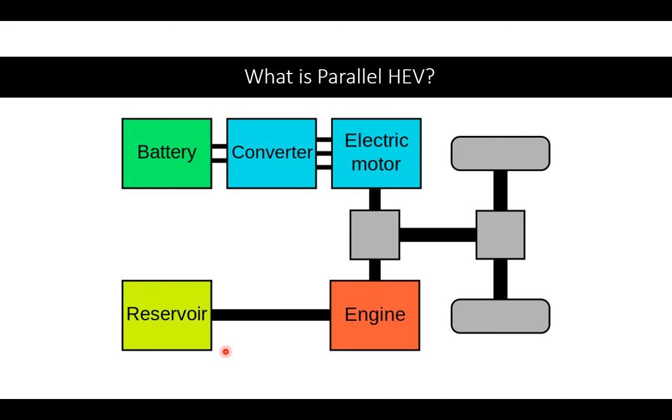The electric motor gets its power from battery, and engine gets its power from the fuel tank. The examples of parallel HEV are Toyota Prius, Chevy Malibu, Honda Insight. Okay, I have compared these three cars here. So the price is almost same for all the three, just $2,000 difference.

Fuel economy is higher for Toyota Prius, which is 58 miles per gallon in city and 53 miles per gallon on highway. The CO2 emission is lowest for Prius, which is 132 grams per kg, and as for the size of these cars, Toyota Prius and Honda Insight are mid-size hatchbacks, and Chevy Malibu is a mid-size sedan.

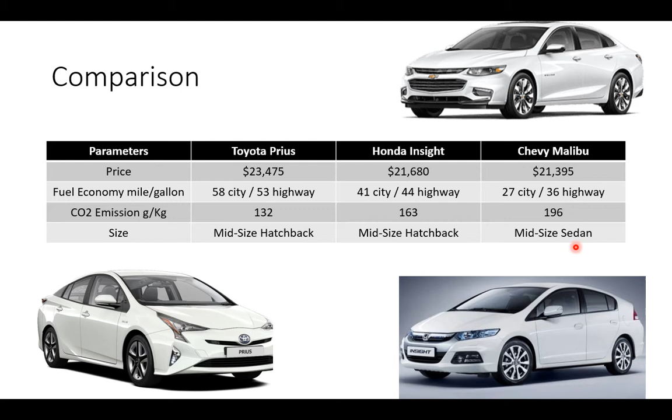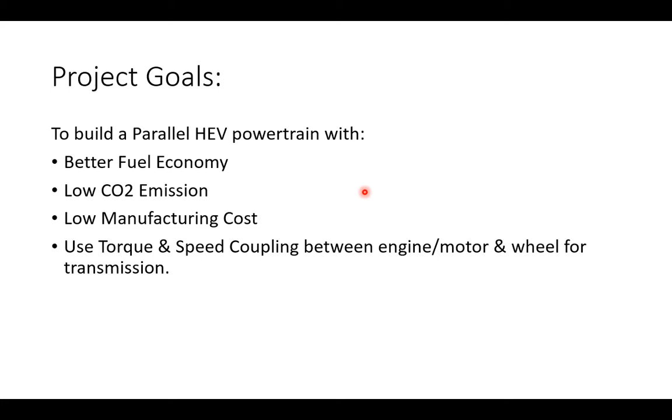Okay, so the project goals: to build a parallel HEV with a better fuel economy than Toyota Prius, which will also have lower CO2 emission than Toyota Prius. Obviously, the manufacturing cost should be lower than Prius. We'll try for that, and we'll use torque and speed coupling to couple the engine power and the motor power.

Simulation. So this is the graphical view of Toyota Prius power drive on Autonomie. The power drive name is HEV Power Split Midsize Gasoline Powertrain, which is similar to the Toyota Prius powertrain.

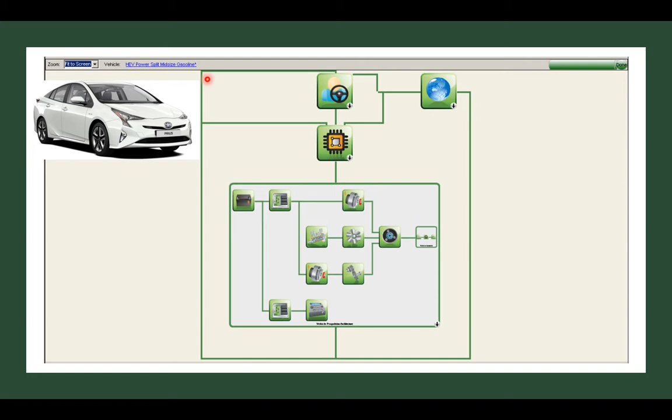Parts which I have used in simulation: the chassis is of Toyota Prius, the planetary gearbox is of Toyota Prius, transmission and final drive is of Toyota Prius. The engine is of the latest Toyota Prius, which is 71 kilowatts. The motor one, I modified this. I'm using the Toyota Camry's hybrid motor here with 88 kilowatt power.

The motor 2, which is used as a generator to generate electricity while regenerative braking, is of Toyota Prius. And batteries: Toyota uses nickel batteries, I'm using the lithium-ion batteries here.

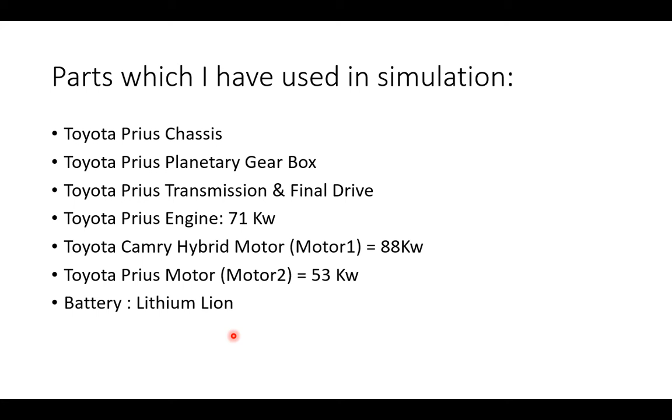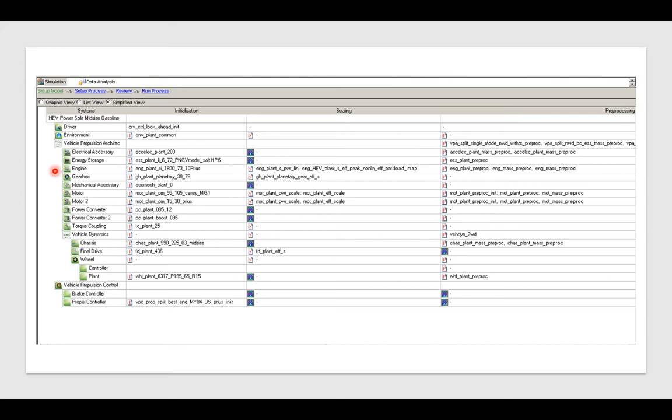So this is the simplified view of all the parameters of our powertrain. So by clicking on driver, we can go in driver and change its parameter. By clicking on each of these, we can go inside and change its parameter. So if I want to change the engine parameter, I'll click on engine and change its parameters.

So I have kept these parameters for my powertrain. The driver parameter: I put driver weight as 80 kilograms. In battery parameter, I have changed the SOC initial, the SOC max and SOC min of the battery. In engine, I have changed the Prius engine power to 71 kilowatts.

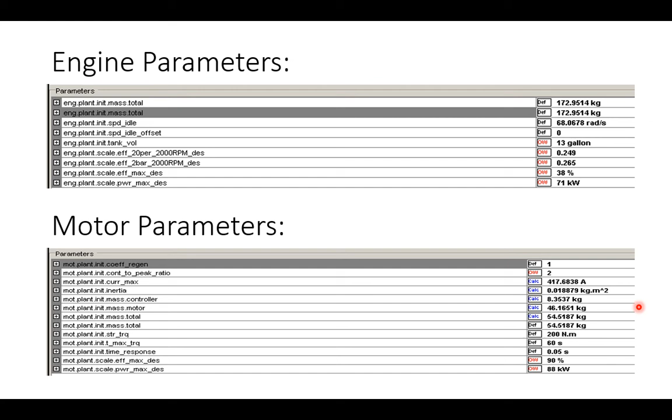So whenever you put your power here, the mass of the engine is adjusted according to your power. So the mass gets adjusted. The same way, when you put the motor power, the mass of the motor is being adjusted here. It is auto adjusted. Motor 2 parameters. So motor 2 is the normal Prius motor, and it has the 53 kilowatt power.

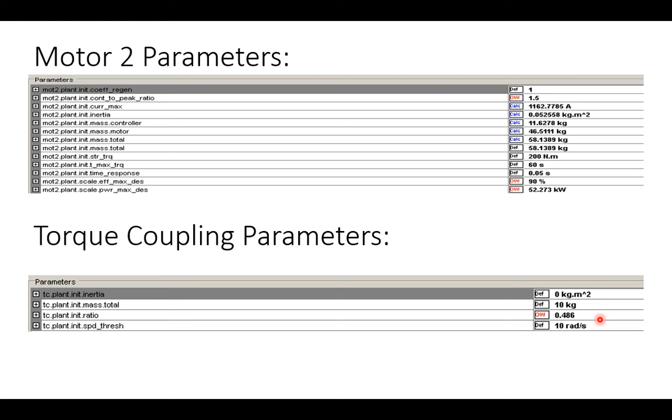Torque coupling parameters. The torque coupling ratio of Prius is 0.486, which I got from Toyota documents. Chassis parameters. So as we are using the Toyota Prius chassis, we'll be putting the parameters accordingly. So the aerodynamic drag is 0.24, the frontal area is 2.2 square meters, and the total body weight of chassis is 840 kilograms. Final drive parameters.

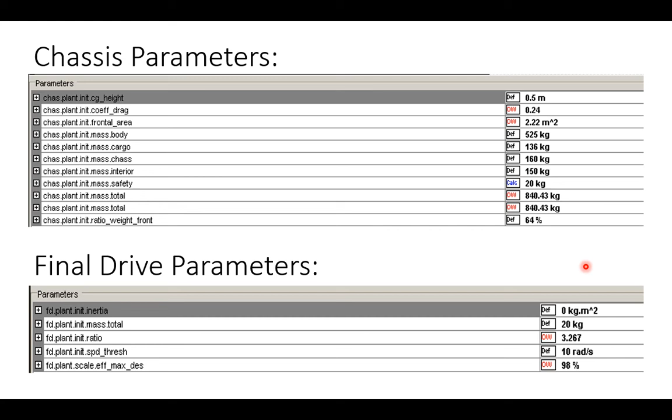Final drive ratio is 3.26, which I got from Toyota official website. For the wheel, we put the Toyota Prius wheel radius, which is 0.3175 meters, and the rolling resistance coefficient over here in first row.

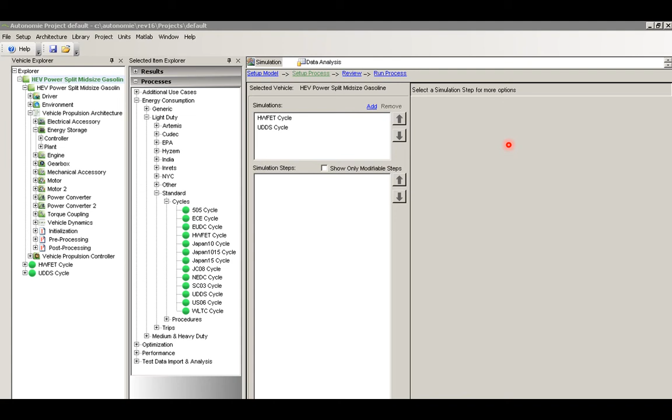Then we select the two cycles. The HWFET cycle is for highway, and UDDS cycle is a city cycle. So we'll run our vehicle on highway cycle and city cycle and see what outputs we get. So next we go in the run process. In run process, we perform the simulation. Before performing, we make sure that all the parameters are inserted and both cycles have been selected.

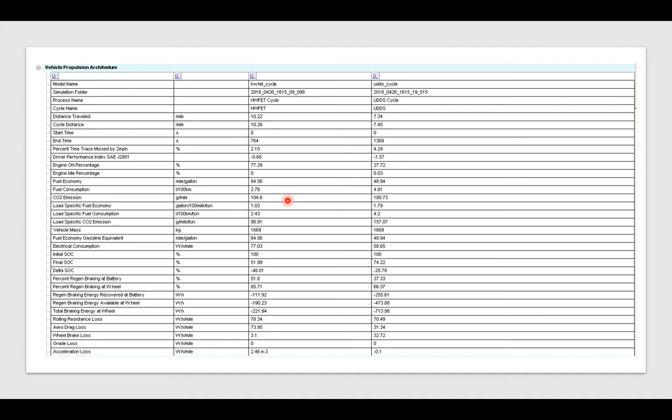Results. Okay, so these are the results. As you can see, the fuel economy of our modified powertrain is 84 miles per gallon on highway and 48 miles per gallon in city. The fuel economy is better than Prius. The CO2 emission is 104.6 on highway, which is much less than Prius CO2 emission. Okay, so the estimated total manufacturing cost for our vehicle will be around $17,000, which is not too bad.

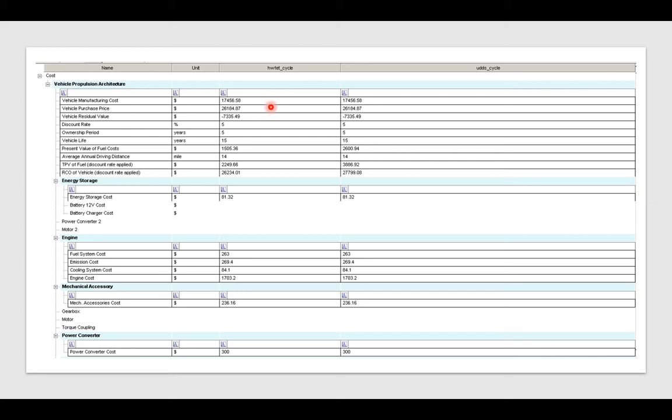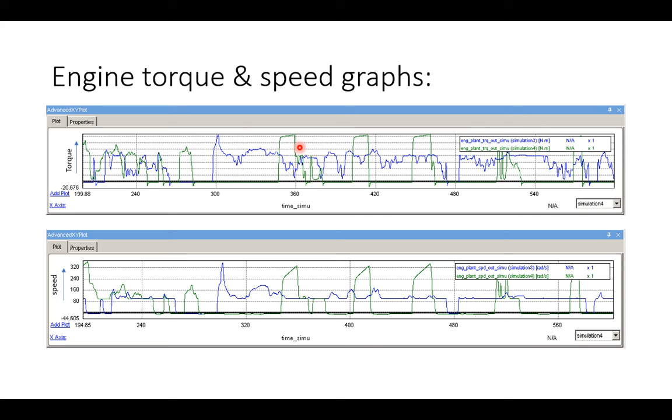These are the engine torque and speed graphs, and as you can see, simulation 3, the blue one, is for the highway, and simulation 4 is for the city. So as you can see, before the speed goes up, the torque goes up, and when the torque is lowered, the speed increases. You can see that in city too. Compare these two green graphs. Here the torque goes up first and the speed is low, and then the torque falls down and speed increases gradually.

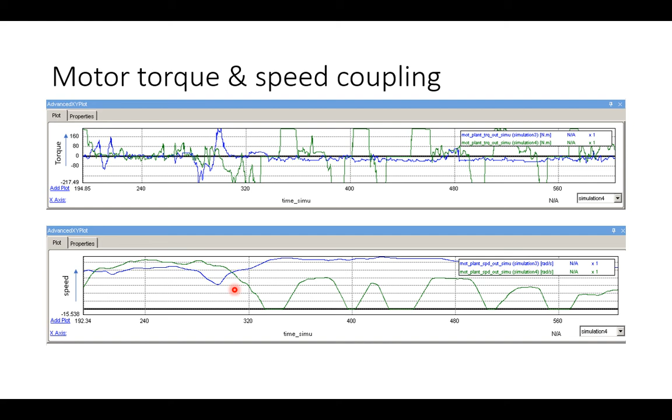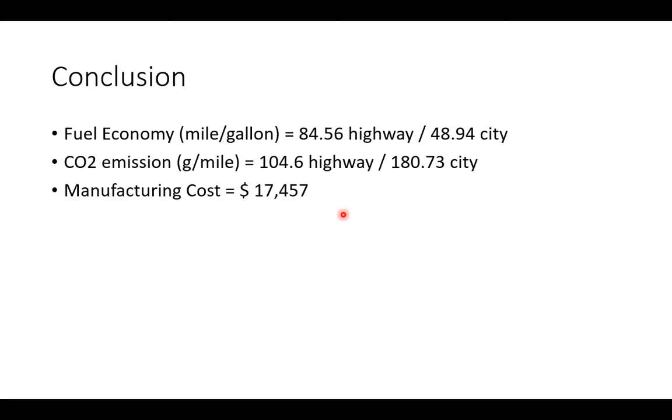The CO2 emission is less than Toyota Prius, which is almost 120, and we got 104. Manufacturing cost is also affordable. It will be around $17,000 to $18,000. So these are my references.